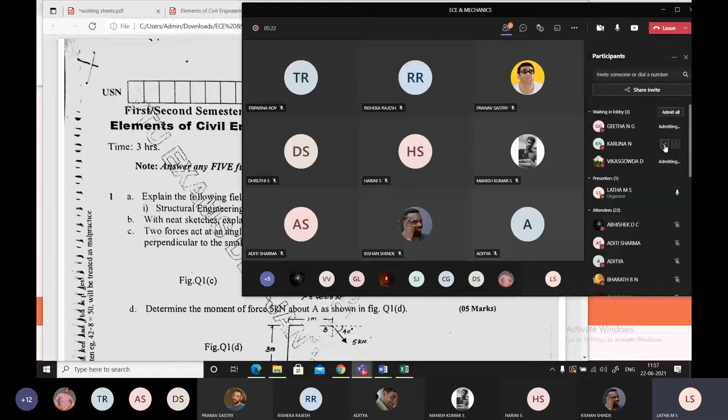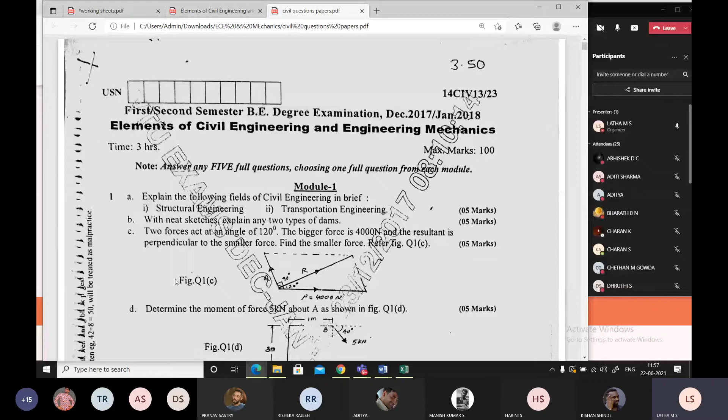Okay students, take down the first question. You can very much see that, and most of you have attended this question, correct? Explain the following fields of civil engineering: what is structural engineering and transportation engineering? What's the explanation you'll be giving?

Ma'am, structural engineering is doing load analysis, design the components of the structure. You can read from your notes, assignment book, what you have written. The same answer can be read out. Please read that loudly. Everyone should be prepared with this book. The notes are already available with you as assignment. Yes, read out.

Structural engineering deals with the analysis of various structure systems like buildings, dams, bridges, reservoirs, power generation units, water and sewage treatment units. It plays a vital role in planning, design, and building of structures. Structural analysis and design are the components of structural engineering, and structural engineers are responsible for the creation of the structure in accordance with the clients and architects, and play an important role in building industrial production and manufacturing units. The structural engineer is a key man in planning and designing nuclear reactors, and has to take care of environmental safety, mainly by radiation protection and thermal protection. A structural engineer takes responsibility for the safety and serviceability of the structure for its lifetime.

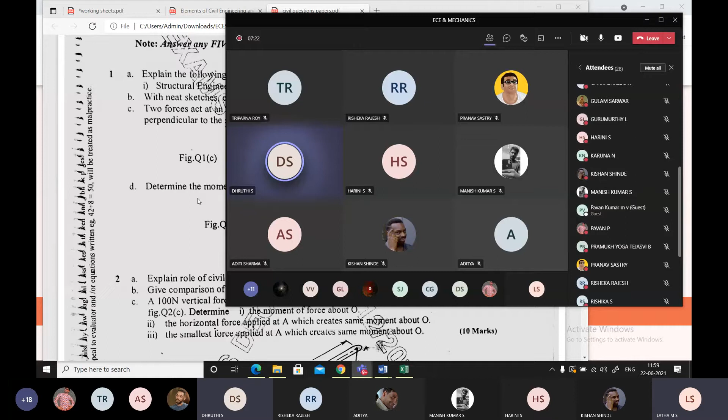Yes, very good, Dhruthi, keep it up. Now Kishan, can you please read out the transportation engineering part? Kishan, yes ma'am, please read out for transportation engineering.

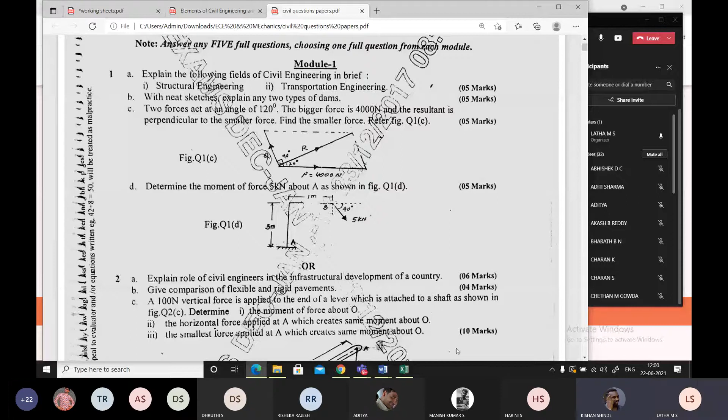Quickly. Transportation is the movement of man or goods from one place to another. It helps in the industrial, social, cultural and economic development of a country. For economic development of any region, every commodity like food, industry products, water, gas, and labor requires a transfer system. Planning of the transport system is done with respect to survey and analysis of existing conditions and forecast of future conditions. It promotes public and mass transport. It involves study of accidents, safety, and comfort of transport services.

Okay, that's it, you've written a very nice, very good and complete answer. Now, Manish.

Manish. Manish Kumar. Is Manish absent or present? Manish. Manish Kumar is... Syeda.

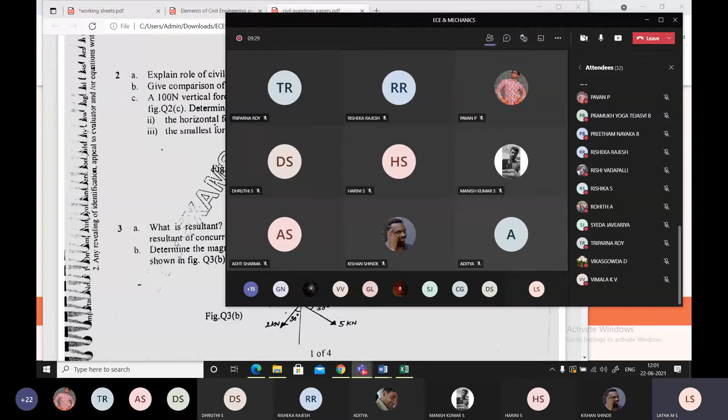Yes, Syeda ma'am. Can you read out the explanation for the role of civil engineers in the infrastructure development of a country from your assignment?

Excuse me, ma'am, when they ask us for the explanation for structural engineer and transportation engineer, do we have to even write the scope of that? No, not necessary. You can directly write for the specified asked fields only, not the scope or anything like that. The explanation given by Dhruthi and Kishan is enough. Yes, very good.

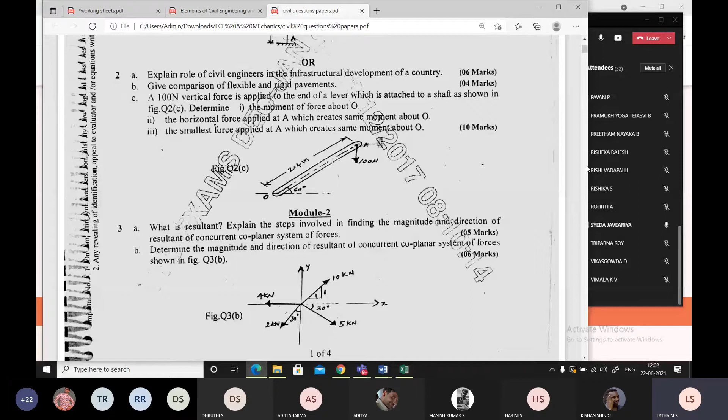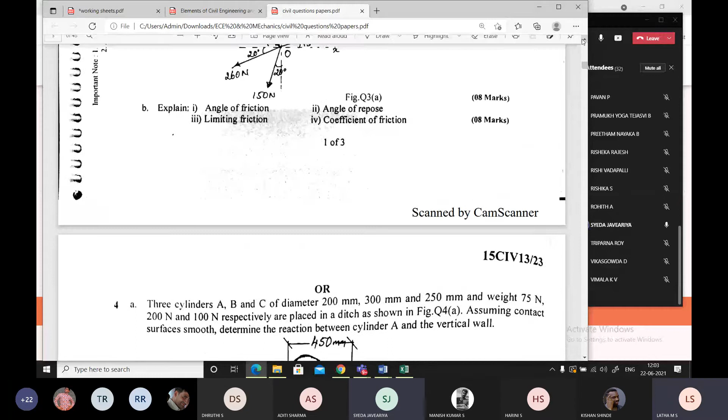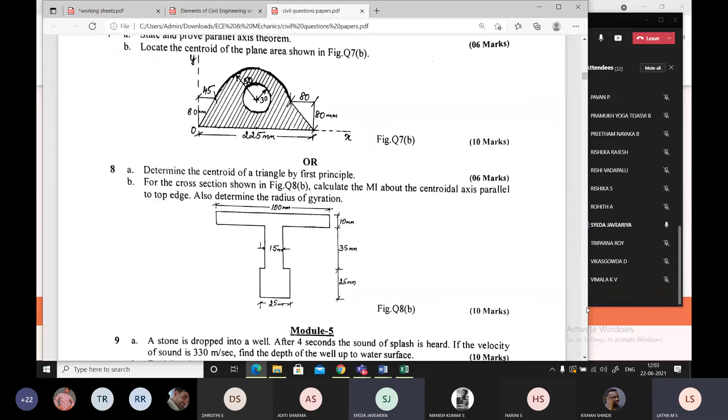Now Syeda, can you read out the answer for the role of civil engineers in infrastructure development? Quickly. Civil engineer plays a vital role by looking into public needs like shelter, building, water for drinking and irrigation, transportation facilities, power stations, and disaster management or reduction, which forms the basic infrastructural demands. Civil engineers take up the construction job and build various structures, etc. That's all.

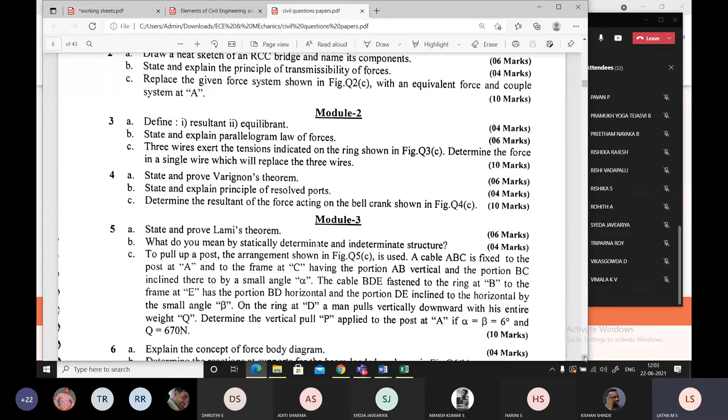Triparna Roy, correct, that answer is correct. Triparna Roy. Triparna. Vikas Gowda. Vimala.

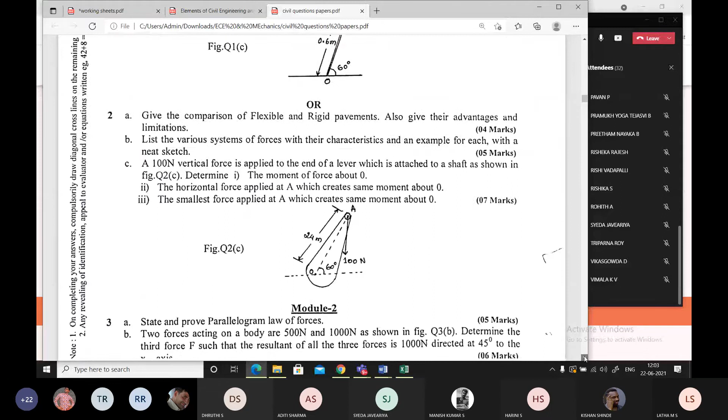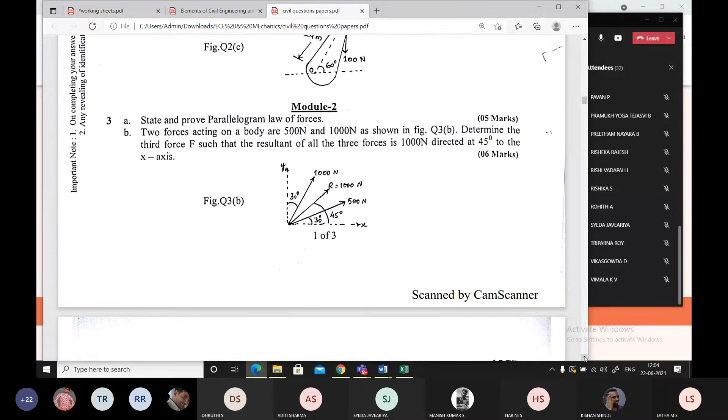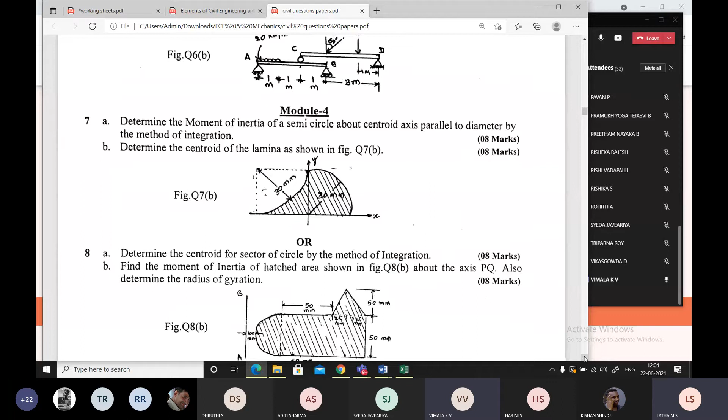Yes ma'am, can you give me the statement of the parallelogram law of forces? If two forces are acting simultaneously on a body at a point, represented both in magnitude and direction by two adjacent sides of a parallelogram, then the resultant is represented, both in magnitude and direction, by the diagonal of the parallelogram, which passes through the point of intersection of the two sides of the parallelogram.

Yes, very good, very good. Now everybody take the next problem under revision, please write. Ma'am, how much is the portion for IA, till yesterday?

It is 1.5 modules. One module we have completed, and the second module half we have completed, with the roller problem and the string problem. And now, after your test, we have to go with friction. Okay students, is it clear?

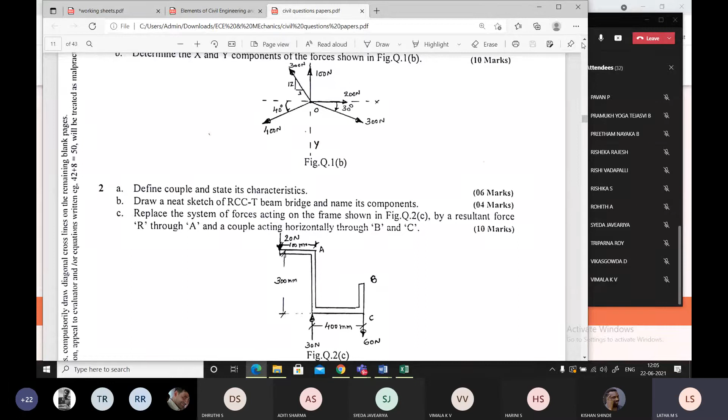Determine the x and y components of the forces shown in the figure.

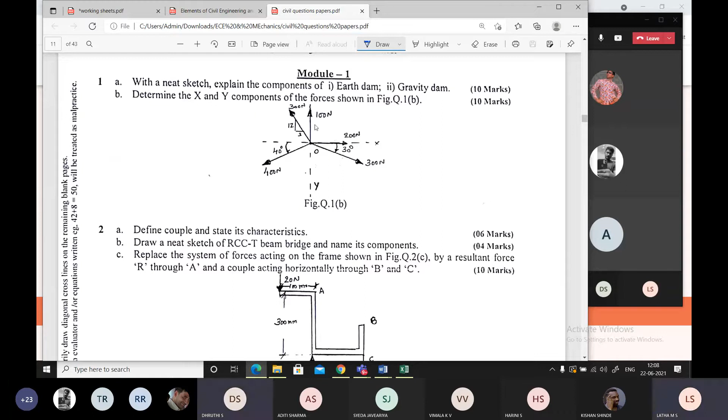Resolve the forces. Yes, 100 Newton has to be resolved. No, ma'am, it is directly on the axis of Y. Correct, it is on Y axis, so no resolution is required for this.

What about 200 Newton, students? No resolution is required, it is clear. What about 300? Yes, ma'am, you have to resolve it. Sorry, I'm wrong there, drawing it.

So, one second. You can resolve 300 and 300. So what is the horizontal component? 300 cos 30, and this is 300 sine 30.

And what about this 400, students? It's a very simple problem. This is 400 sine 40, and this is 400 cos 40. Correct? Yes, ma'am.

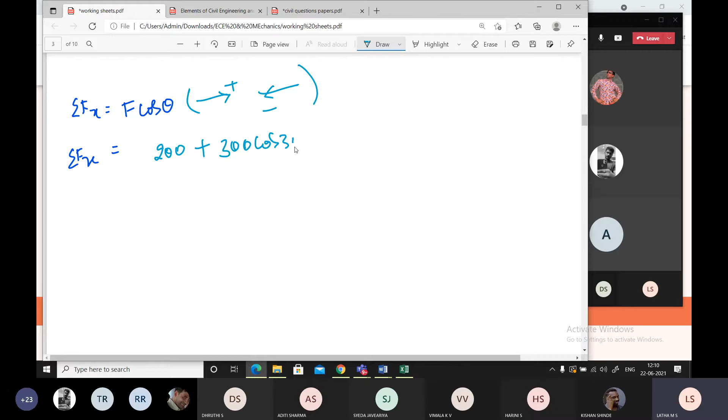Then minus what? Minus 400 cos 40. Anything else? Ma'am, we have to find the angle of that triangle, the angle of the 300 Newton force. It's not given. No, ma'am.

300, how do you resolve it? How do you calculate this 300? Tan theta, ma'am. Yes, it is inclined. Correct, so vertical 12 and horizontal 3. You can imagine it to a greater scale. If you don't understand, this is theta, this is 12, and this is 3.

So tan theta equals opposite, 12, by 3. Therefore, what is theta? 75.96, ma'am. 75.96.

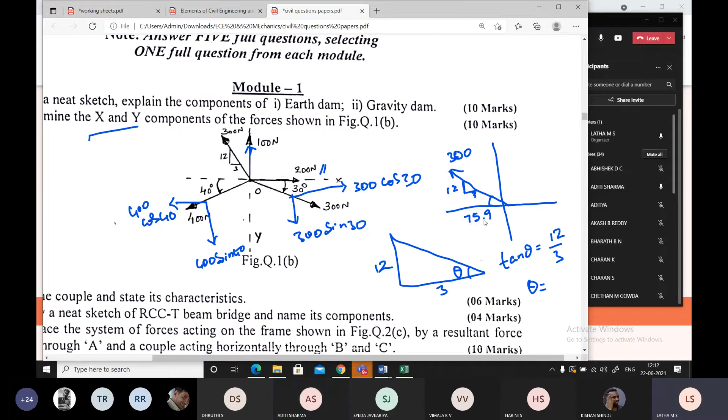So we can write it as minus how much? Minus 300, minus 300 cos 75.96.

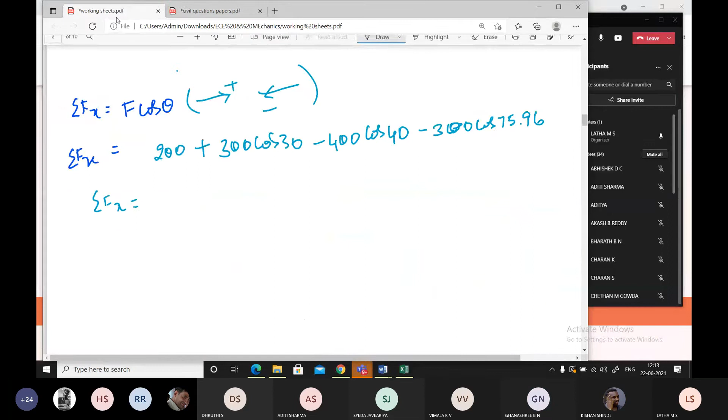Now calculate sigma Fx. What's the value you get? 80.61. What's the unit? Newton, ma'am. Do you get the same answer, others in the class? Yes, ma'am.

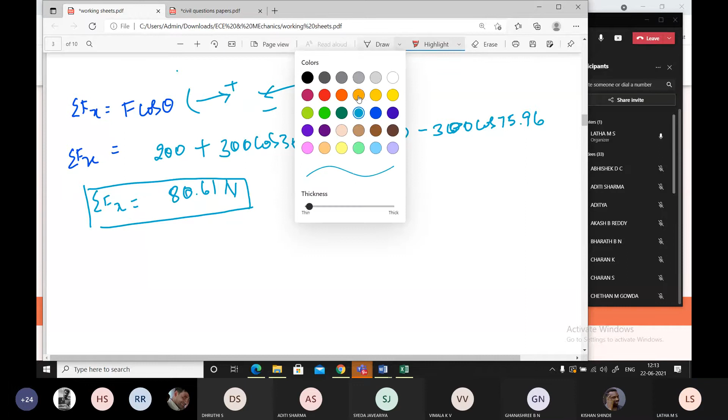Similarly, sigma Fy equals F sine theta. What direction, sign convention do you take? Upward is positive, ma'am, downward is negative.

Okay, now tell me one by one, how many forces will contribute? 100 will contribute, 300 will contribute, 200 will not contribute for the vertical, 300 sine 30, 400 sine 40. Correct?

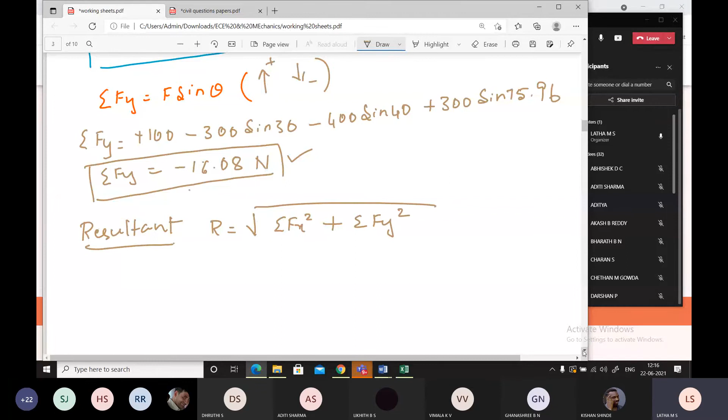So R is equal to root of sigma x, sigma y value substituted. Sigma y is minus 16.08 square, plus sigma x value is 80.61 the whole square. Correct.

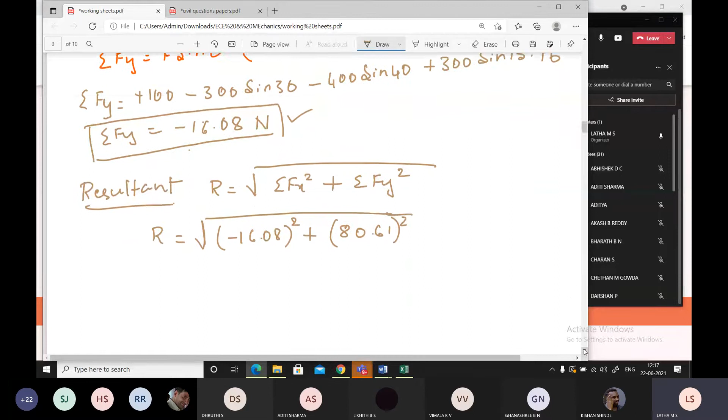Therefore, R is equal to, what's the value of R? 82.19 Newton. What's the unit? Newton, ma'am. Now, after this step, what should you do?

What is the next step? Alpha, ma'am. Alpha. Before that, resultant diagram, remember?

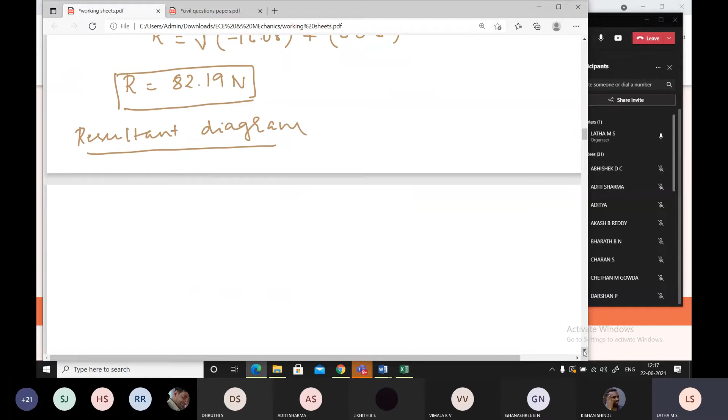How to draw the resultant diagram? Based on what values? Since negative value is there, which quadrant should it come in for Fx? Y value is negative, isn't it? X value is positive, so it's the fourth quadrant.

So sigma Fy is down. Correct. And this is sigma Fx. Correct, yes or no? Yes, because you found this to be a positive value and this is a negative value. So the resultant will be within that quadrant, R.

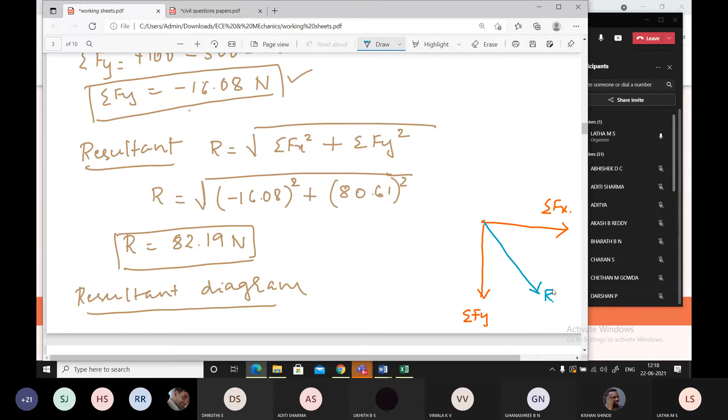So this is alpha. Now tell me, what is tan alpha? Sigma Fy by sigma Fx. So alpha is equal to tan inverse of sigma Fy by sigma Fx.

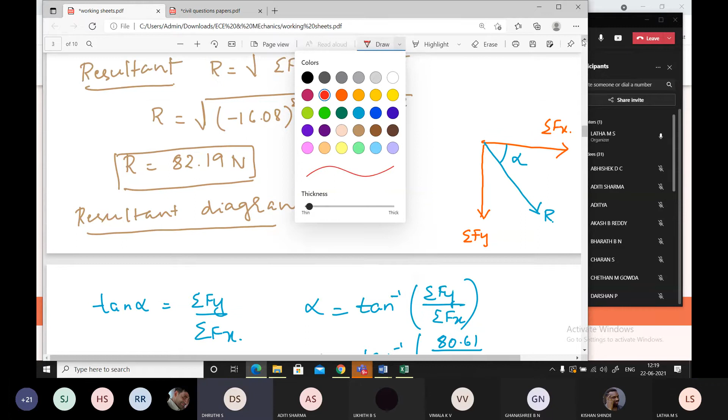Sigma Fy value is 80.61 and Fx value is 16.08. Ma'am, Fy value is 16.08, it's the other way. Yes ma'am, okay, I wrote it reversed. Repeat once again.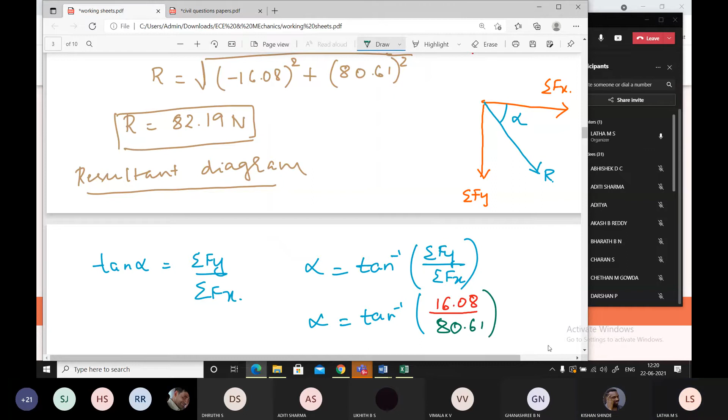Sigma Fy value is 16.08 divided by sigma Fx 80.61. I am not writing the negative value, students, you should not. So therefore alpha is 11.28 degree.

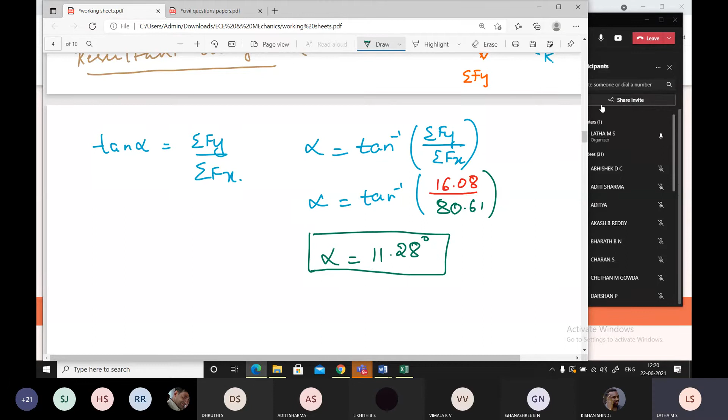In the figure, this alpha, whatever you have calculated, is equal to 11.28 degree. Did you follow? Yes ma'am. Now we'll proceed with the next.

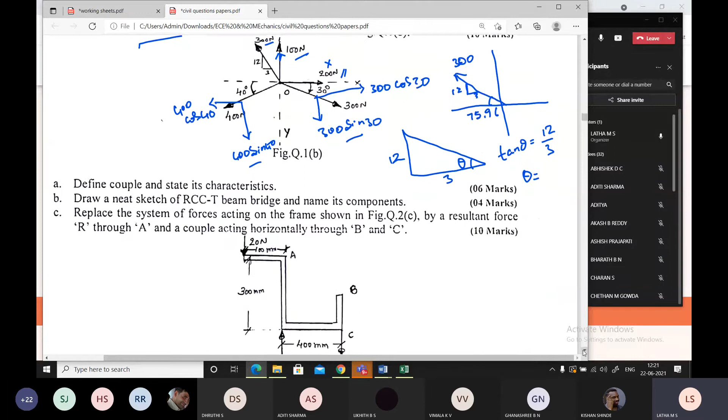This is a VTU question asked. We are solving some of the VTU questions so that it will be familiar to you. What is a couple and what are the characteristics of a couple, students?

What is a couple? Tell me loudly, anybody. Charan S, can you define a couple and its characteristics? Students are very silent in the class. Anybody in the class who can answer this question?

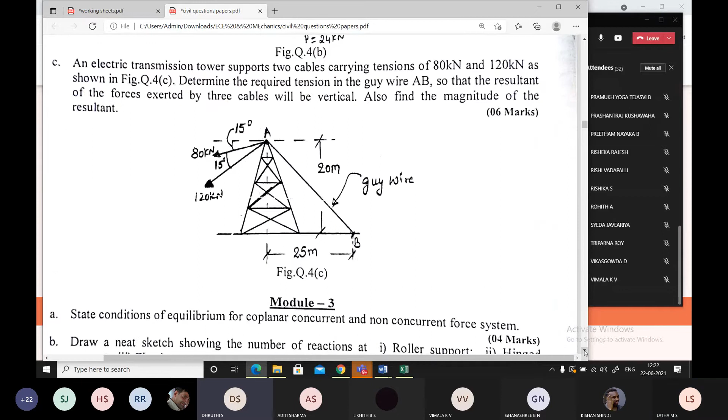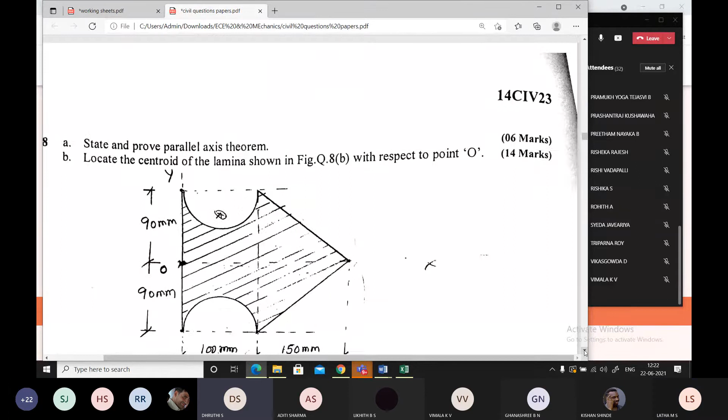When two equal and opposite forces act on a body at some distance apart, those two forces constitute a couple. What are the characteristics? A couple consists of a pair of equal and opposite parallel forces separated by a definite distance. The sum of all the forces forming a couple at any distance is 0. The sum of all the moments about a moment center forming a couple is the moment of couple.

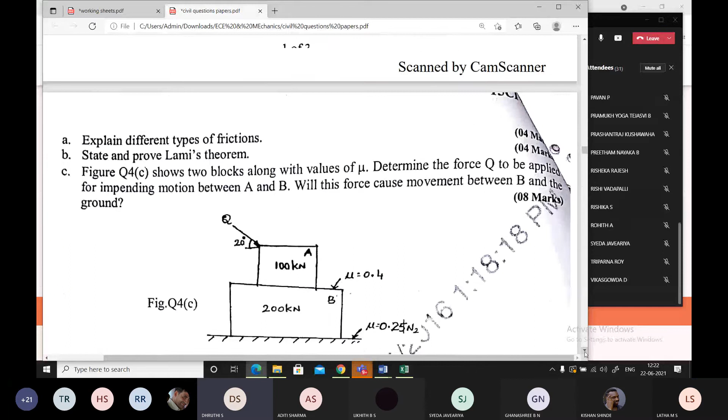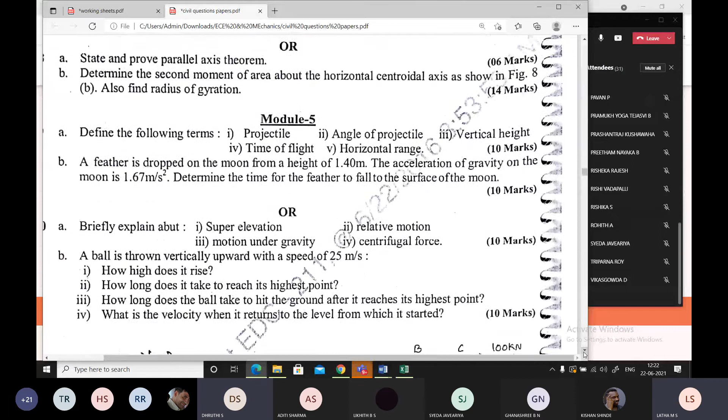Very good. The translatory effect of a couple on the body is 0. The only effect of a couple is moment, and it is the same about any point, so the effect of couple does not change. The rotational effect of the couple about any point is constant and is equal to the product of the magnitude of either one of the forces and the perpendicular distance between them. Very good, very good.

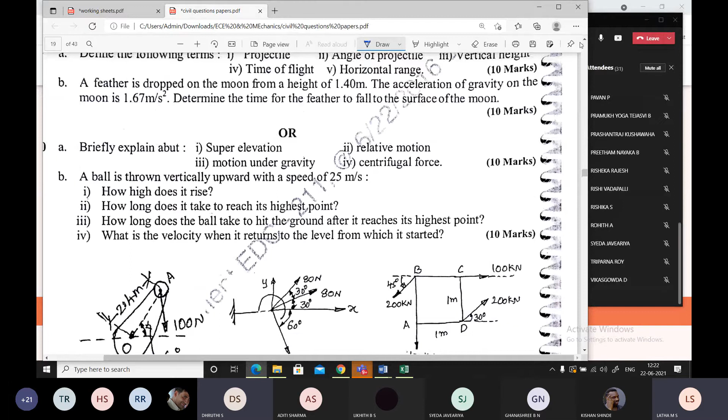Now we'll go to the next problem. Question number 4B, take it down.

A rigid plate ABCD is subjected to the forces as shown in the figure. Don't write '4B'. Compute the magnitude, direction, and line of action of the resultant with reference to the point.

Preetham Nayaka, you are writing? Preetham Nayaka? Preetham Nayaka? Not in class. Okay.

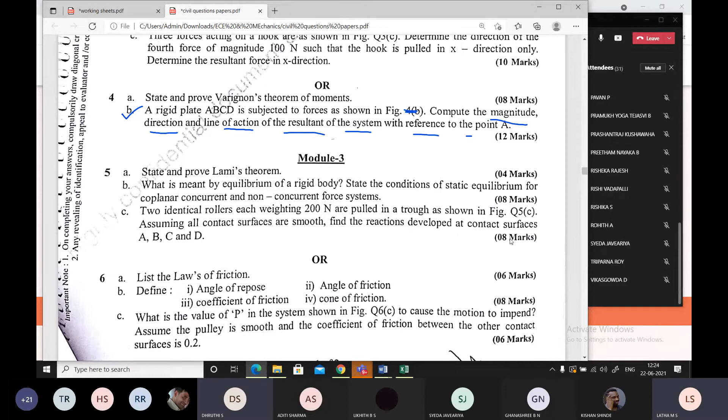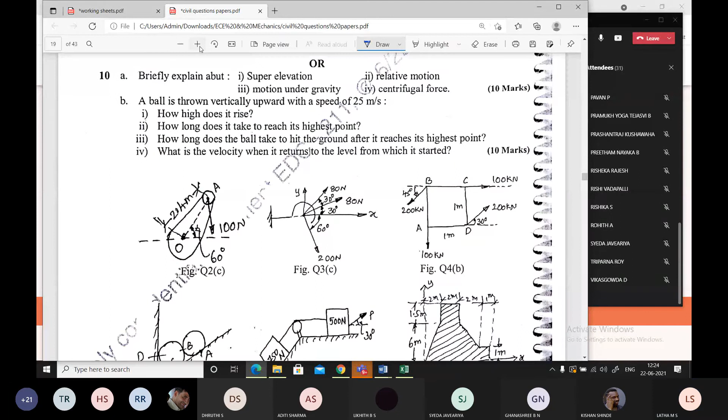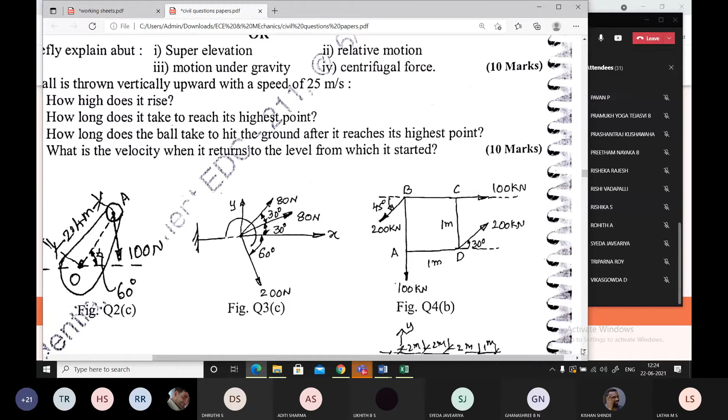Return to the question, students. Now I'll show the figure. This is the figure, I'll enlarge it. This is the figure for 4B. You can see the figure now, students? Yes, some people are there, let me check.

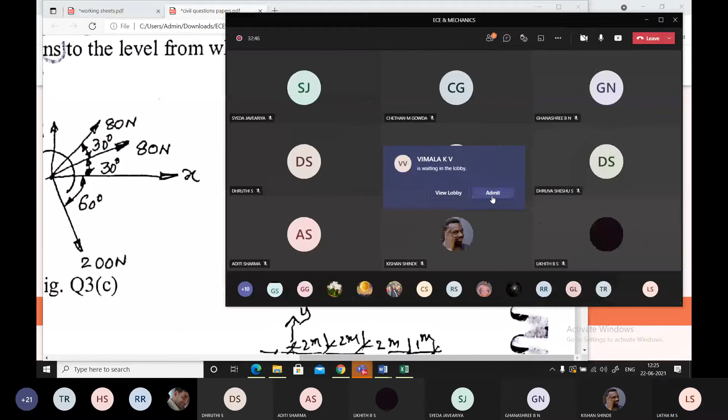What's the question asked? To find the resultant. What type of force system is this, students? Non-concurrent, very good. It's a non-concurrent, coplanar, non-concurrent system. What is the question asked? To find the resultant, direction and magnitude, with respect to point A.

Yes, draw the sketch very neatly. The grid is 1 meter by 1 meter. You find a 100 kilonewton force acting down, a 200 kilonewton force inclined at 30 degrees, a 100 kilonewton force horizontal, and at B an inclined force of 200 kilonewton at an angle of 45 degrees.

Now what is the first step you will be doing? Bharat? Akash? Yes ma'am, what is the first step you will be doing? Sigma fx equals 0 and sigma fy equals 0, like that. You are getting confused. No ma'am.

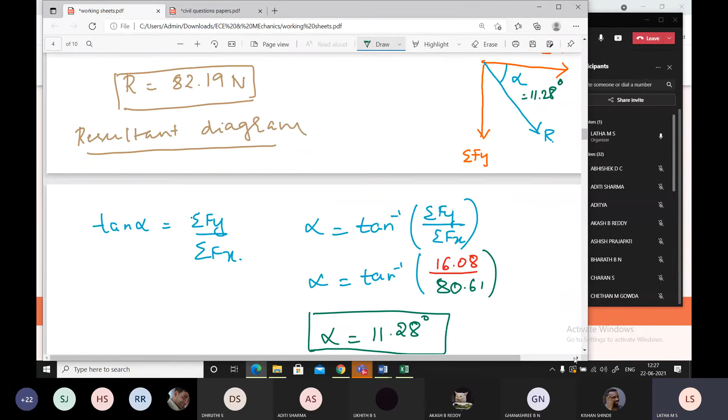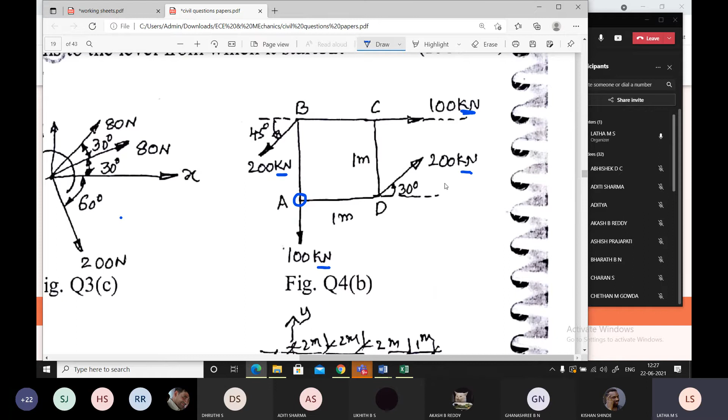Done with the diagram, everybody? Show it once again ma'am. A, B, C, D: 100 kilonewton, 200 kilonewton, 100 kilonewton, 200 kilonewton. One is vertical, one is horizontal, the other two are inclined. Yes ma'am, done. Now give me the first step.

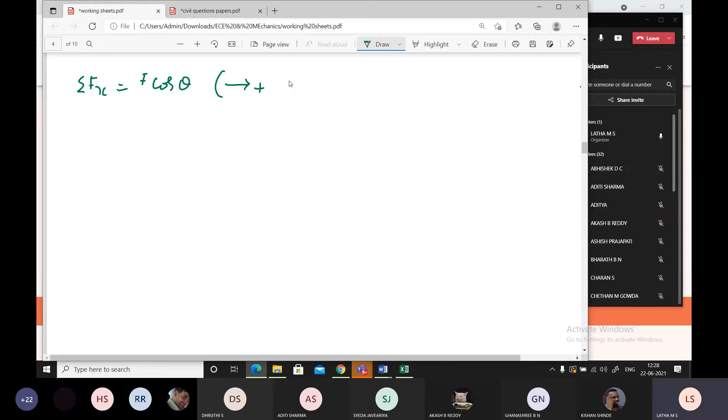Calculate sigma fx, which is equal to F cos theta, taking all right-moving forces positive and all left-moving forces negative. Tell me, can you tell me directly without any working on this figure?

Ma'am, 100 plus 200 cos 30. Correct, tell me. Then minus 200 cos 45. Very good, very good. So it's 100 plus 200 cos 30 minus 200 cos 45. Correct. So what's the answer you get?

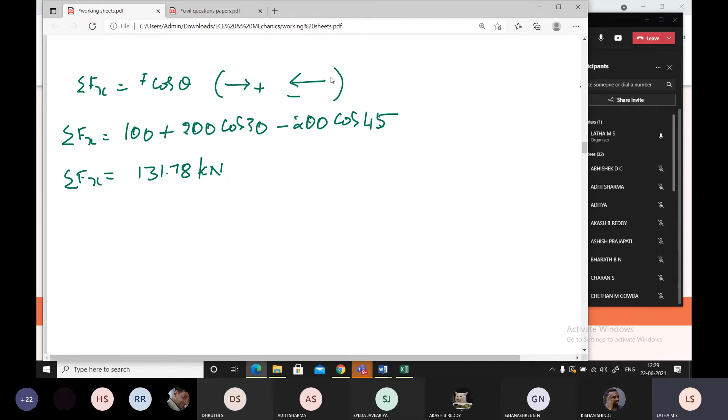131.78, ma'am. 131.78, what's the unit? No unit mentioned, no marks. Kilonewton. Kilonewton. One second students, please carry on, I'll be muting myself.

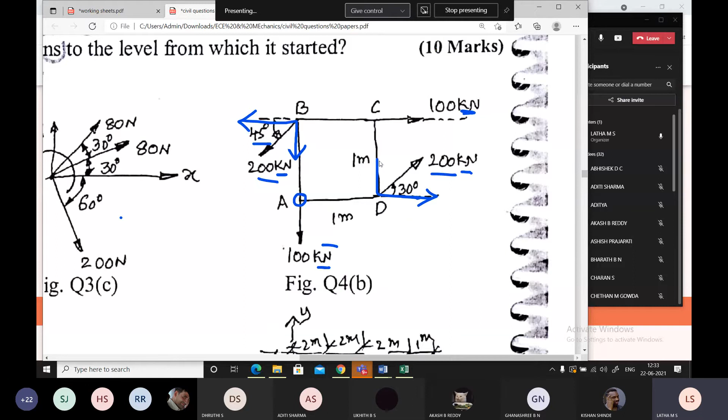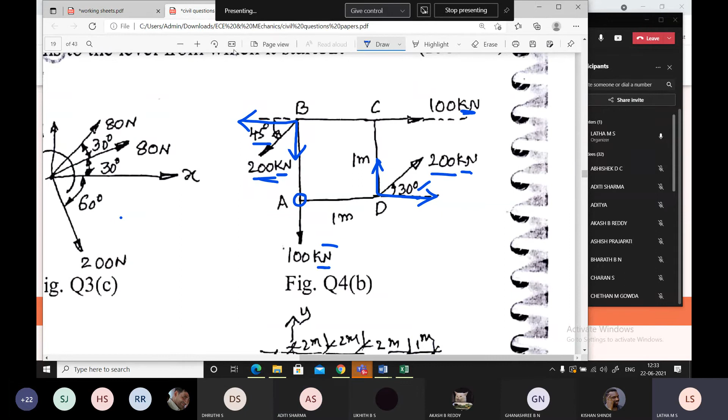Now proceed to calculate the resultant. No, ma'am, you'll get this if you take minus 200 sine 30. If you take plus 200 sine 30, you'll get 58.57. No, I cannot do this. I have to resolve this in this direction, this one in this direction. So minus 200 cos 45, sorry, sine 45, correct. Then plus 200 sine 30, plus 200 sine 30, correct. Then minus 100, correct. What's the answer?

58.57, ma'am, plus... Yes, ma'am, plus 58, point... no, ma'am. Minus 141.42. Yes, ma'am. Minus 141.42 kilonewton. Now proceed calculating the resultant.

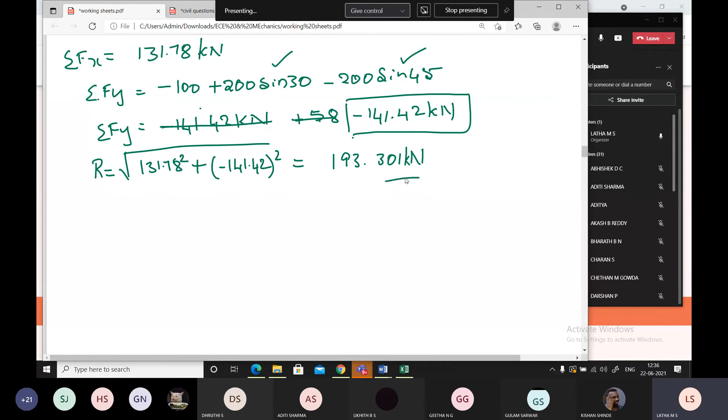What is the next step? Resultant diagram. Yes, resultant diagram. Somebody is on phone hold, when I call their name they don't reply.

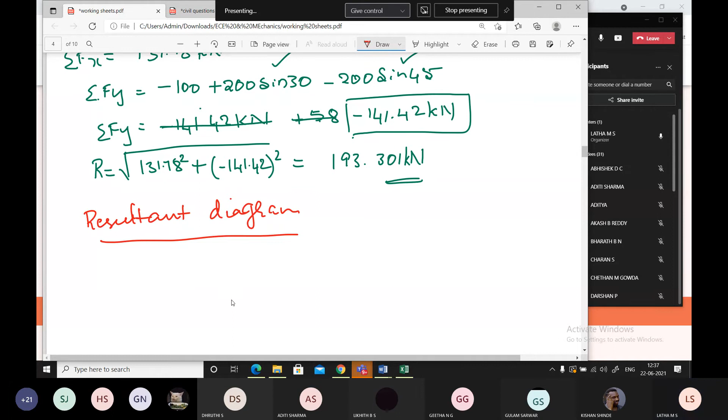Which quadrant will it come again? Fourth quadrant, ma'am. Both are negative. Sigma Fx is positive. Fy is negative. Correct? This is the resultant.

Alpha. Any confusion, students, here? Don't get confused. So what is tan alpha? Sigma Fy by sigma Fx. Alpha is equal to tan inverse of sigma Fy by sigma Fx. Now tell me the answer of alpha.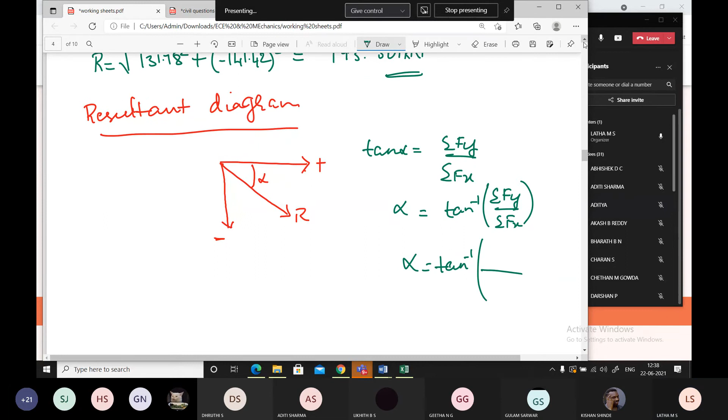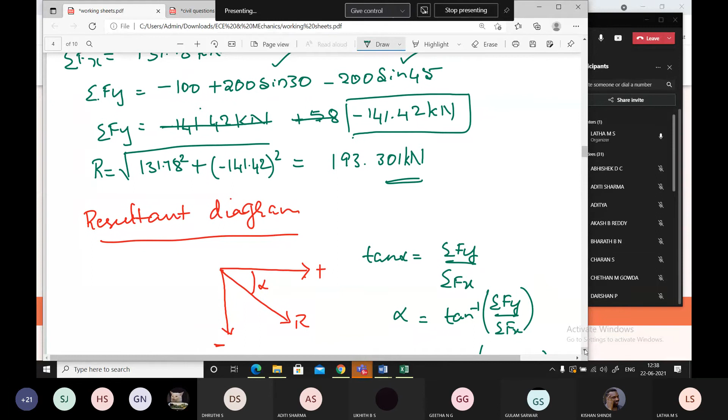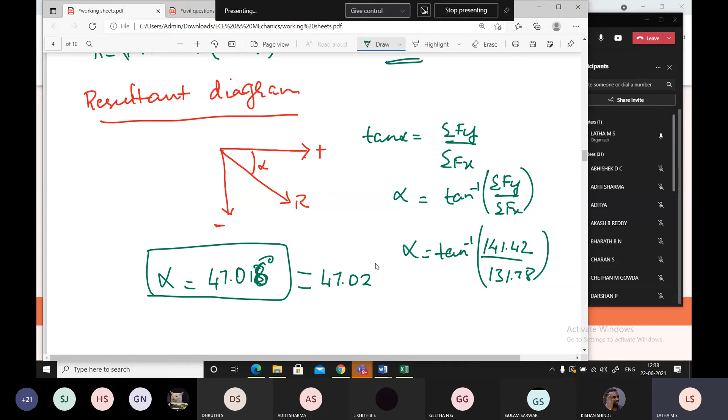Substituting the numbers only, not with the negative sign. 47. What is sigma Fy, students? 141. Correct? Is the substitution I have made correct? Yes, ma'am. Alpha is equal to, what's the value? 47.018. Okay, 16, ma'am. Okay, 16. You can round off to the second decimal, 47.02. Okay.

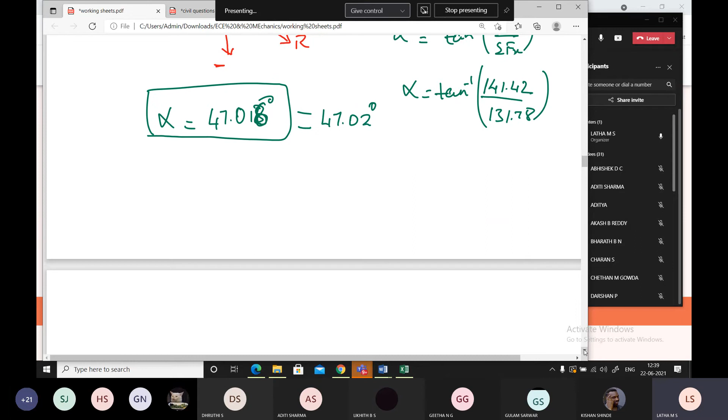Yes, now what is the next thing we have to do? With respect to point A, we have to define the distance. Isn't it, they have asked the distance. Yes or no, students? I'll continue that part tomorrow in the class. Okay students? Fine. Yes or no? Okay, yes.